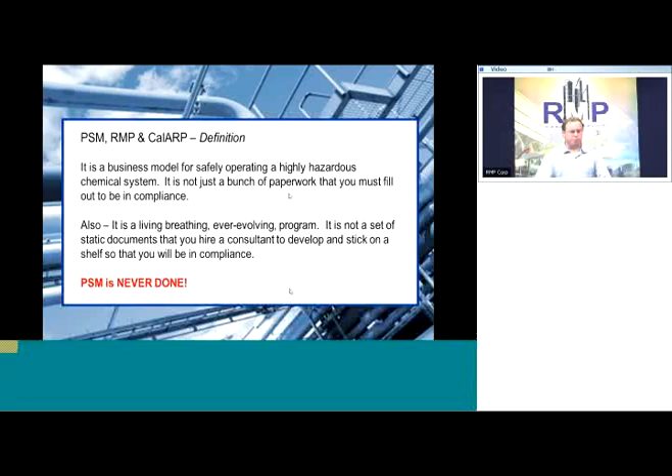So it's something we have to convince the people we report to - that I'm never going to be done, next year I've got to do mechanical integrity inspections again. Today's focus is going to be on the IIAR Bulletin 109 forms for conducting mechanical integrity inspections.

I'm not going to really focus on what the form says, that could be pretty boring. We are going to look at the forms a couple of times to highlight a few things on them, but I want to talk about the background stuff - the things you need to be looking for to fill out the forms correctly.

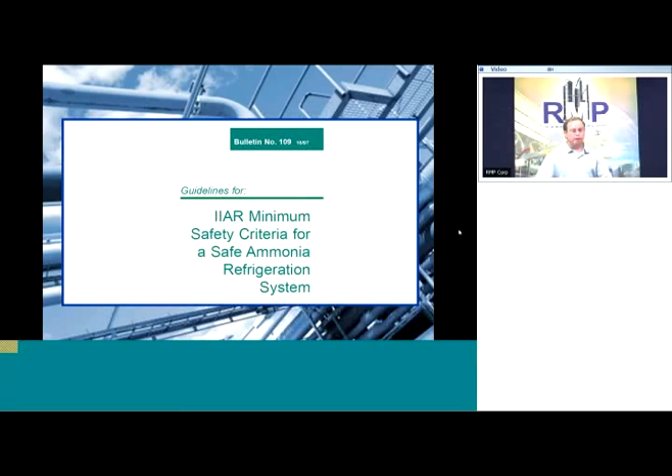First thing is we need to talk about the regulation. The reason we're doing these inspections is because this business model, called 29 CFR 1910.119, says we need to do these inspections. It says that inspections shall be performed on process equipment.

And in the food business, there's confusion here over the word 'process.' We think of process as in I process strawberries, or I process chickens, or I process something. Well, that's not what it means when it comes to PSM, RMP, CalARP. From a regulatory standpoint, we are not a food processor, we are a chemical company. Our process is our refrigeration system. That is our process. So when it says perform inspections on our process equipment, that means our refrigeration equipment.

That's our process. Inspections and testing procedures shall be performed using - and to me I don't like this term, but everybody in the industry is throwing out this RAGAGEP thing - generally accepted and good engineering practices.

The RAGAGEP acronym I'm not real thrilled with, it's kind of a clumsy thing to say, but that's a critical part of everything PSM - it follows good engineering practices. So Bulletin 109 is a guide to following good engineering practices when conducting our annual visual inspections.

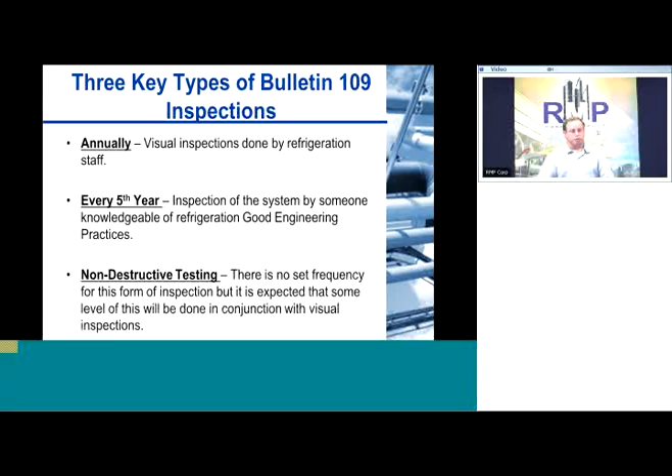Annual visual inspections - make a plan, get it done. This isn't something you want to remember in December, like 'oh yeah, I forgot, I got to do that again this year.' This is something you need to plan for, have a plan, and enact the plan. Smaller facilities, you could pick a week - the 3rd week of April is when we do all of our annual visual inspections - or you pick a time to do it because you only have so much equipment.

But large facilities, places with lots and lots of equipment, it should be part of your PM program. It should be a PM in whatever software you use - I know a lot of large companies are using SAP these days to manage their PM programs. It should come out as a PM that says inspect this piece of equipment. However it is done, whenever it is done, just make sure you get all the equipment done and tested and inspected, and that these are separate from our regular PMs, and that we document that we've inspected every piece of equipment every year.

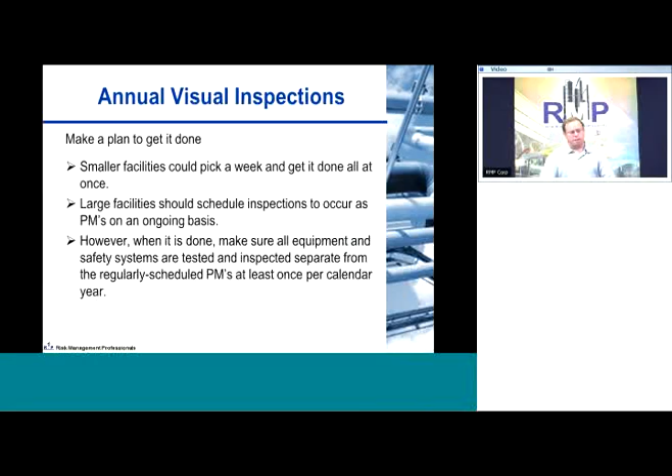5th year inspections - this is a tricky thing to implement, because there's no consistency in the industry. You're going to hire who you're going to hire - a consulting engineering firm or a refrigeration contractor - and they all have different skill sets, different levels of knowledge, different ways of conducting these. In my experience as an in-house corporate PSM guy, I would hire firm A for one facility and firm B for another, and in my mind, visiting these facilities, they were in about the same condition, about the same size.

At one facility, the contractor I hired gave me 5 recommendations for the whole facility - and 5, I mean, he missed a lot of things. Then at another facility that was very similar, a different contractor was hired, and he gave us 850 recommendations. I don't know how you guys manage your recommendations and how often you review them, but can you imagine having to go through 850 recommendations and reviewing them monthly and driving them forward? That's a huge task, so there's got to be ways of grouping those or something. You have to carefully pick who you're going to use, because you don't want anything missed, but you also want it manageable.

This is not a free ticket. Every 5th year I have an outside person come in, but I would still make it part of your task to assign somebody each shift, however you do it, so that one of your operators is working with the inspector. Your operators know better what the deficiencies are than someone walking into the facility for the first time, so keep them together so they can help guide the inspector through the facility and show them the deficiencies.

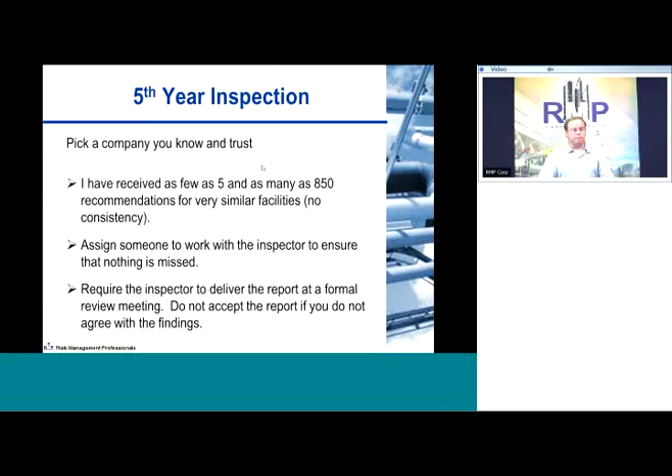Non-destructive testing, in my opinion, should typically be done as a follow-up to visual inspection concerns. I don't think you should just hire a non-destructive testing company to do ultrasonic thickness testing of your piping just because you felt you should. There's not a lot of value in it, and the snapshots of random places they choose to inspect don't give you much information. So don't just do it to say you did it.

Avoid inspection types like ultrasonic thickness testing where they drill a hole in your insulation, insert a probe, then fill the hole, which creates a mechanical integrity issue right there. Try to avoid companies that use that methodology. There are companies that use X-ray and other technologies that give you more sample points without penetrating your insulation.

Also, regulators want to know you're doing non-destructive testing, and it falls into lots of categories, not just pipe thickness testing. If you have a vibration analysis program, an oil analysis program, or an ammonia quality testing program, count those as part of your non-destructive testing so you can show a regulator you have an ongoing non-destructive testing program.

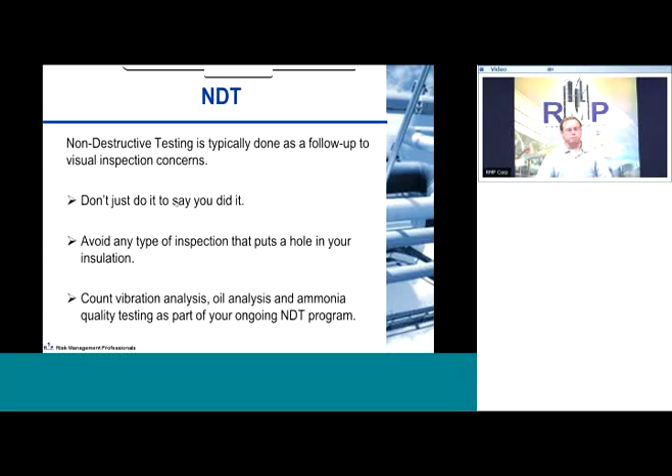Inspections are not PMs, I want to make this perfectly clear. You need a PM program that follows what the manufacturer says you should do, but that doesn't fulfill the requirement to do the inspection. The inspection is a separate activity, a separate exercise from all the PMs you've done in the year. It's supposed to be totally separate because when you're working on or fixing equipment, your focus is the task at hand.

The annual visual inspection is a separate time to go look at the equipment and assess how it looks, sounds, runs, and operates, then document anything your PMs might have missed. There are lots of things that don't come up as PMs, like a piece of equipment needing paint, or a wiring junction box missing its cover. You'll see these things when you step back and look, and you may fix them as you go, but you still need a separate record, because this is the old adage of PSM: if it's not documented, it didn't happen.

So we need a separate inspection where we document either that on that day we didn't see anything wrong, or these are the things we saw wrong that we need to fix.

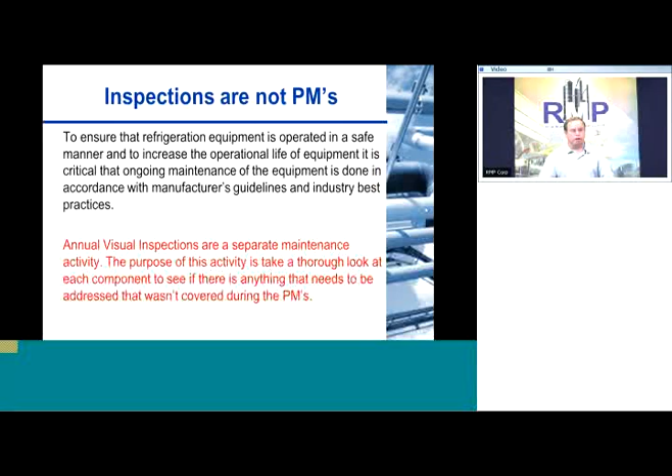Going back to the definition, we're inspecting our process equipment. Our process is our refrigeration system, so all the components of the system - there's a B109 sheet that addresses that.

Compressors, pressure vessels, heat exchangers, evaporators, condensers, pumps, piping, ventilation, relief valves, and general safety - every piece of equipment should fall into that category somewhere. As for valves, I guess there's not a sheet just for valves - I think that falls under the piping sheet, or each piece of equipment has valves associated with it, so you'd look at the valves at that time. But other than that, that's a pretty comprehensive list of generically what all the components of a refrigeration system comprise.

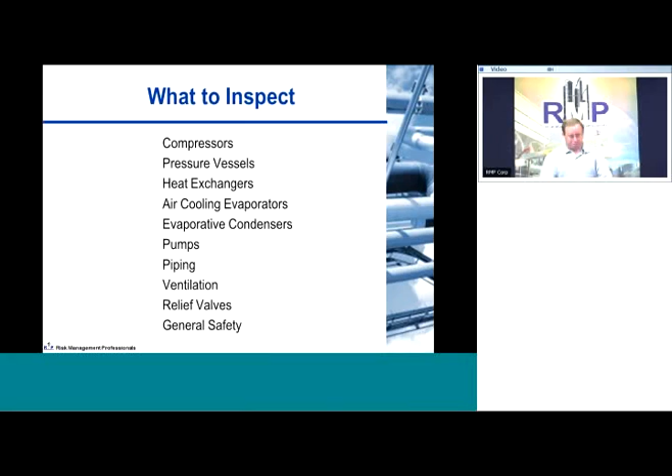Managing your time, especially with big systems, is critical, because if you have 1,000 annual visual inspections to do in a year, that's very time consuming.

So when you look at the B109 sheet, and we'll look at them in a minute, there's two sheets. There's a first sheet that gives you all the technical information about the piece of equipment - model numbers, serial numbers, operating pressures, all this stuff. And then there's a second sheet that is an inspection checklist.

It's my feeling that first sheet should be filled out either when the piece of equipment is first put in service, or if you haven't done it then, do it now. Save all those sheets in a binder associated with your process safety information. This is good information to have at any time - if you have to look up a model number on the motor for a fan or something, this is a great resource to go to.

And that information, that first sheet, should never change unless you've had an MOC process - you've done something to that piece of equipment that caused a change in it. And that could lead us into a whole other webinar of what is an MOC.

Say a compressor - if you change the motor on a compressor, the new motor is going to have a different serial number than the old motor. So this, in my mind, institutes an MOC process, because now I have a PSM document, the front page of the B109, that has to be updated with the new serial number.

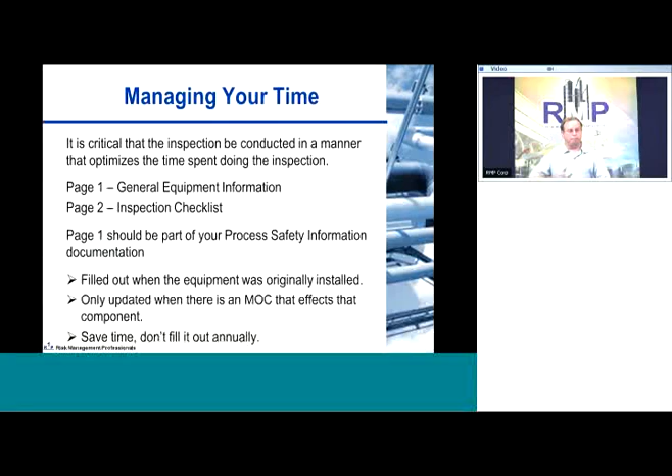First mechanical integrity point I'm going to talk about is piping. Piping is probably the hardest part of our system to conduct an inspection on, because you've got piping going everywhere.

How do you figure out how to break up the facility, and how many piping inspection sheets? You can't just use one piping inspection sheet for the whole facility. Do you have one for one header, or one for piping that's inside? You've got to come up with a plan - there's no set way I would do it. Every facility is different, so you have to come up with your own plan of how to break down the areas you're going to inspect, how to properly document the inspections, and how to document where the deficiencies were.

If you see bad insulation somewhere, you need to be able to go back and know where that place was that you found the bad insulation, whether it's tagging it with a number out in the field or associating it with a piece of equipment or a valve group. Somehow identify it so that when you're going through recommendations, trying to develop a plan to resolve them, you know where that bad area was - or if it's piping that's rusted and you want to get non-destructive testing, where was that? So that's got to be a critical part of developing this piping inspection plan - how do I remember what part of the system I was looking at when I saw that deficiency.

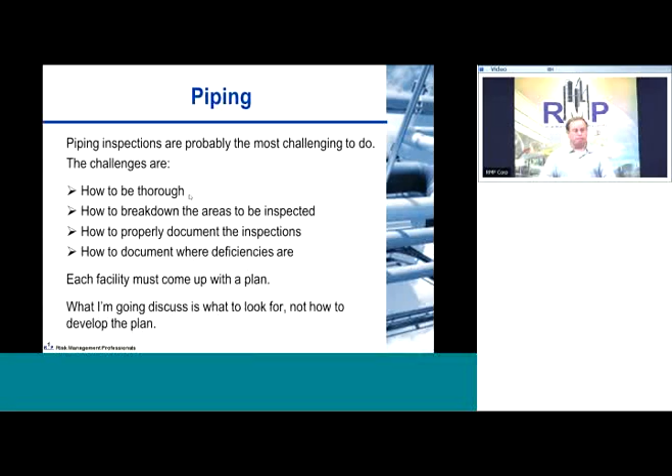As we progress, we're still talking about piping and issues with piping. I want to talk about what we're looking for, and I want you to keep in mind that ammonia is not corrosive. So you can be 90% confident that there's no corrosion going on inside your piping.

Most likely any corrosion is going to be external corrosion, and there's going to be some telltale signs I'll talk about that lead you to believe corrosion is happening. But there's a 10% chance there is some internal corrosion, and I'll talk about that too. Corrosion and wall thickness is a major concern because we want to keep the ammonia inside the system. We don't want it getting out, and if our wall thickness gets too thin, we're going to develop a hole and our ammonia is going to get out.

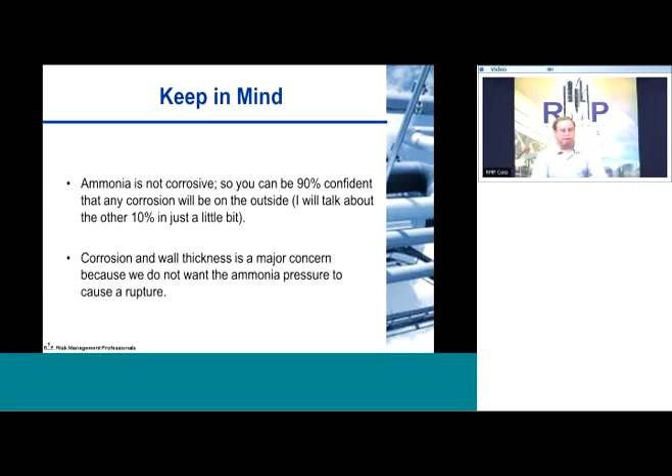The reason that's going to happen is our refrigeration system is kind of like a non-inflatable balloon. The little balloon in my picture has about 5 psi of pressure to blow it up. The high side of a typical refrigeration system runs between 130 and 180 pounds of pressure. So our carbon steel piping doesn't expand like a balloon. As we develop weak spots in piping, it's going to rupture because it can't stretch.

The critical point here is that the ammonia pressure it exerts is a pounds per square inch pressure. So the more square inches of issue we have, the greater the potential of a rupture.

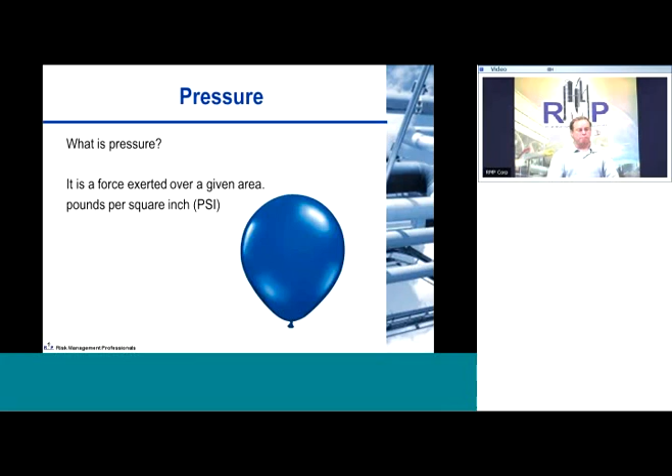Looking for corrosion: if you see corrosion during your inspection, if you see a pipe that looks like this, you've got a concern. Other areas to watch for as you're walking through and looking at piping and corrosion is if you see large amounts of ice buildup on insulated piping.

If you run your hand underneath the insulated pipe, or look underneath it, and there's some kind of growth, dirt, or mold under there, that tells you the insulation is compromised and there's moisture inside causing a condensation problem and a bacteria opportunity inside that insulation, or the insulation has holes penetrated in it, or is just bad insulation.

One of the facilities I worked with many years ago, going off subject a little bit, had the best line labeling program I'd ever seen in my life. They had line labels everywhere. And I came to find out that it was a stopgap measure more than anything.

They had PVC jacketed, insulated piping outdoors that had gotten in bad shape. So anytime they developed a hole in the PVC jacket, they put a line label on it to cover up the hole. So their pipes were really well labeled, and I guess that was a good solution.

But if you develop a hole in your protective jacket, it's going to damage your vapor barrier. And once your vapor barrier is damaged, you're going to get moisture down into the pipe. So it's critical that where we have bad protective jacketing, we address those issues.

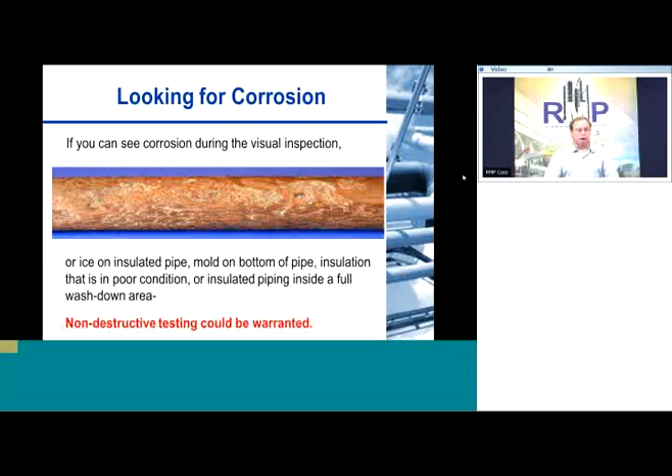Rule of thumb: I developed a rule of thumb, and if everybody looks at their thumb, if you can put your thumb over a corroded spot, and the corroded spot is as big as your thumb or bigger, then that piece of pipe is questionable. It's beyond saving. Going back to pounds per square inch as our concern.

Small pinholes that are fairly deep aren't as critical as larger crevices in our piping that have a large surface area, because we're dealing with a force. The more surface area, the less material we have to hold back the force of the ammonia, and the greater the likelihood for rupture and damage.

There's a whole set of equations, I believe from the American Petroleum Institute, that talk about wall thickness and corrosion, and you could get into a very technical analysis of your piping. But I think the rule of thumb is a good rule of thumb: if you can put your thumb over the bad spot and it's bigger than your thumb, it's a bad piece of pipe.

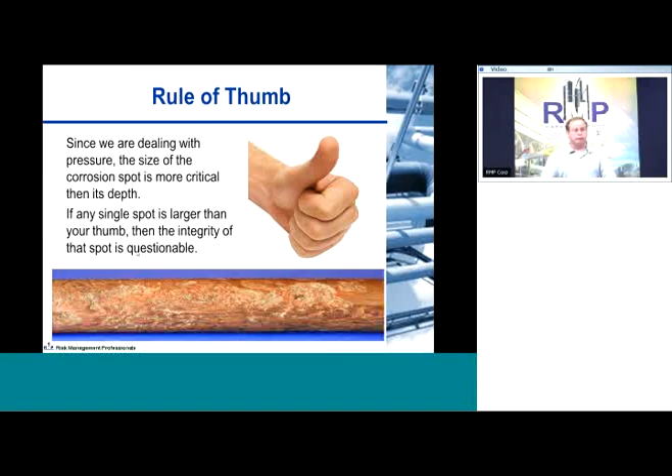The other 10%. I mentioned that 90% of all your corrosion is going to happen on the outside of your piping, but you get a 10% chance it's going to happen on the inside. So that 10% chance, if water finds its way into your system, it can wreak havoc. If water gets into your refrigeration system, it's not going to leave your refrigeration system.

When we start asking questions, if anybody wants to know, I could tell you some interesting ways water can get into your refrigeration system that you probably never thought about. But once it's in there, it's going to stay in there, and it's going to get stuck somewhere, in a recirculation loop, and it's not going to leave that loop ever.

But when we're talking about water inside a refrigeration system, we have to keep two things in mind: one, water and ammonia love each other, so they're just going to hold hands forever and never let go. And oil and ammonia don't mix, and oil and water don't mix.

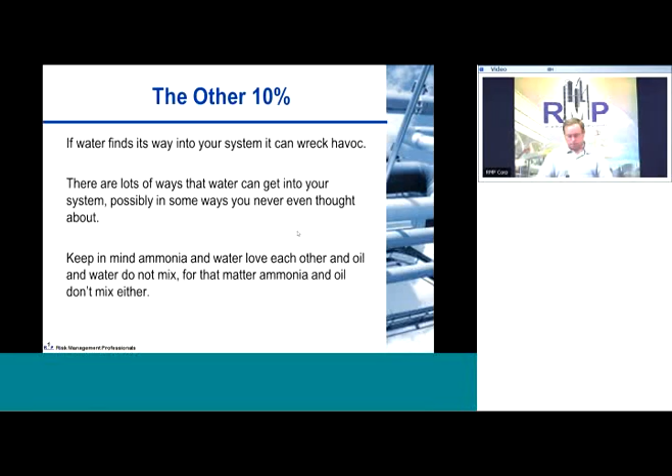So when you drain your water, people think, well, when I drain oil, I'm going to drain all my water out. That's not going to happen, because the oil and water don't mix, but the ammonia and water don't want to let go of each other. You may get some residual water out from time to time, and if you see water when you drain oil, you know you've got a lot of water in your system. There are other ways you have to get the water out of the system.

As part of your non-destructive testing program, a good PM program, I think you need to at least annually do samples and do a water quality check. When you purchase ammonia new, it's 99.95% pure, meaning it's got 0.05% water in it. A little bit of water is important to keep the ammonia a little happy, but too much water is hard on our pipes.

This is the type of measuring device used for measuring percentage of water in ammonia. Basically, if you get out of that little nipple part in the bottom more than 1.5%, you've got too much water in your system, and you're going to have to do something about that.

If you do have water in your system, it's going to get stuck in a cold place. It usually gets stuck in the coldest place, but it can get stuck, depending on where it entered the system, in any recirculation loop. It's typically in a recirculation loop that it gets stuck, and the reason it gets stuck there is...

As your ammonia is going through this process, the ammonia boils off and goes back to the compressors. But water boils at 212 degrees, so it's not going to boil. It just stays in there, and then it gets mixed with new makeup ammonia, and it just stays in this cold area.

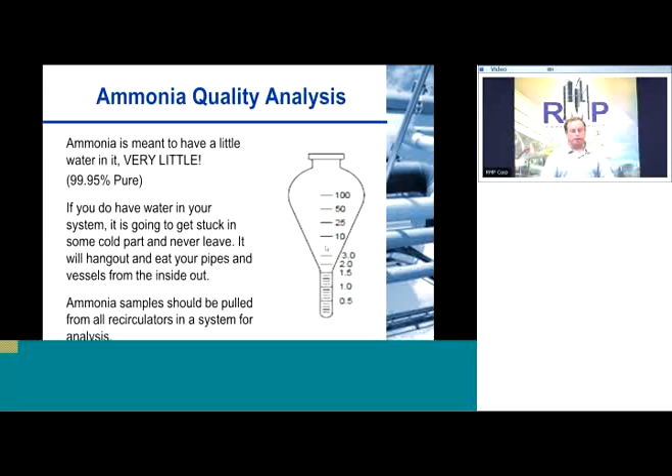Oil analysis. Do you do it? I know I've dealt with a lot of facilities that say, oh yeah, we do oil analysis, we pull samples off our compressors twice a year. I think that's great, and you're going to learn a lot about what's going on inside your compressor, but I think we're missing an opportunity when we just pull these samples off our compressors.

Oil is supposed to stay in the compressor. It's not supposed to ever leave the compressor, but from time to time, for whatever reason, bad coalescing filters or just the nature of our system, oil does get to other parts, and so that's why your operators have to drain oil at these oil pots and stuff on a regular basis.

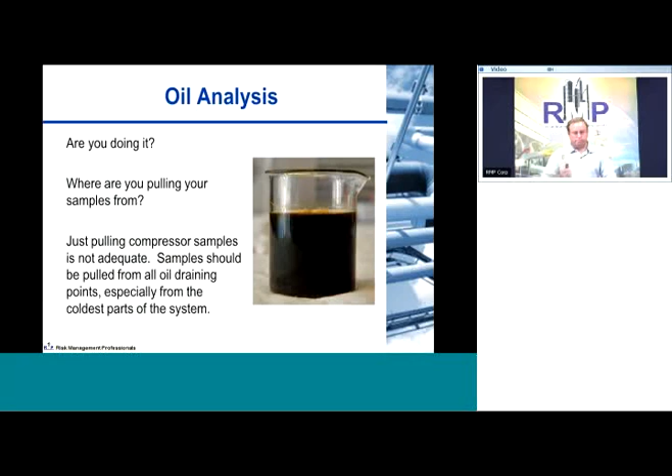So what happens is oil travels through our system. It leaves our compressors, goes through the condensers, goes to the high-pressure receiver, goes to the recirculator, goes from the recirculator to the evaporator, back to the recirculator, and then it ends up in the oil pot. So it's traveled around the system quite a bit before it makes it to the oil pot.

And in its journey, it's learned a lot about your system. For one, it's put a protective coat of oil throughout all your piping, which is a good thing. But the other thing is if I do have water somewhere and I have rust and corrosion and debris or whatever, it's going to pick up some of that stuff along the way.

And so if I pull my oil samples from my oil pots and get those analyzed, there may be some residual water that I find.

So these samples will tell us that what we're looking for is rust, residual water, and possibly metallic flakes. Metallic flakes is primarily what you're looking for when you pull your samples out of your compressors, but there could be other opportunities for them to gather up metal from your pump impellers or from different places. So it's good to pull these samples. You'll learn a lot about the inside of your system, and you'll learn if you've got any of that 10% chance of water in your system by pulling these oil samples.

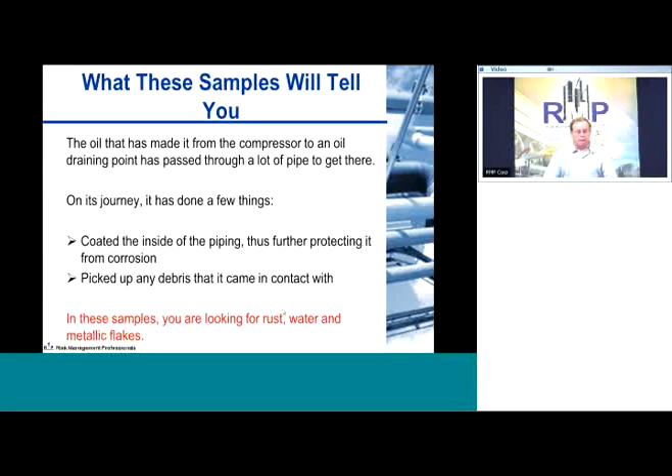As I was talking about piping, that was about pipes and vessels, because all this water issue affects pipes and vessels the same way.

But I did want to talk about vessels a little bit more. What I want to talk about in vessels is, in a minute, I have Steve switch over to the vessel B109. It asks you a lot of questions, but it doesn't ask you about corrosion concerns until question J. So halfway down the list, it doesn't even ask you about corrosion concerns, and that's really your most critical thing you're looking for here: possibilities of corrosion externally or internally. A good painting program keeps corrosion off the vessels on the outside, but these water samples and stuff are where we find these issues.

So if you'll switch over, Steve, to the B109, and scroll down just a little bit for me. Like you see at the top there, it talks about things like: do I still have a nameplate? That's what I talked about, filling out the front page and keeping it filled out and on file, not filling it out every year. But does this thing still have a nameplate on it?

That's an important thing to check every year, because for whatever reason, the painter comes along and paints over the nameplate, or the mounting bracket corroded so the nameplate fell off. You always got to make sure that annually you are looking for this, because if the nameplate falls off, we want to get that thing stuck back on as quick as we can. Don't weld it on, heaven forsake, but glue it back on or something with some kind of really tough stuff. Is it still legible? Did they paint over it?

Before we get down to J, and I'm not really going to talk about J, but I wanted to bring this one up because it's relevant to everything we do. There is a B109 about relief valves. However, each piece of equipment that has a relief valve has questions on it asking about the relief valve. So for this vessel, it's saying: do I have the proper type, correct setting, correct capacity, installed correctly? So every time I look at a piece of equipment that has potential, like a heat exchanger or a compressor or a vessel, it's going to ask me about my relief valve on that.

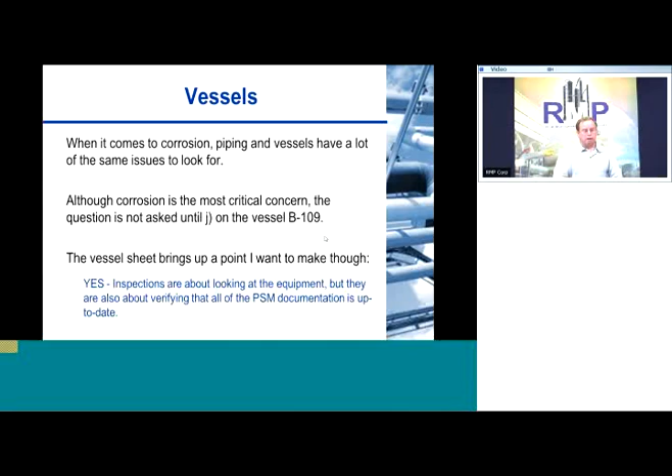Okay, let's move on. I've talked enough about pipes and vessels and corrosion. So I'm going to move on to another piece of equipment. The next piece of equipment we'll talk about is water corrosion. Maybe some people will respond, let's see if anybody responds. Anybody guess? We're going to talk about water corrosion. What piece of equipment in your refrigeration system is most likely going to need to be replaced in the next 10 years?

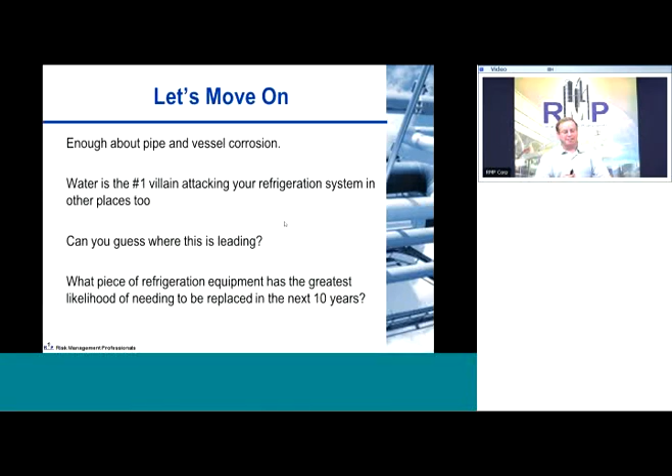Okay, I think I'll move on, nobody's going to guess, huh? It's your condensers. Condensers are the harshest environment in our refrigeration system. They just take a beating, and it's all because of the water. We're putting water into these things, and we're evaporating water. And when water evaporates, it leaves behind solids that are nasty, and we have to deal with these solids. And if we don't deal with the solids, they decide they want to clump together and eat - I mean, they'll eat galvanized steel. It's a very harsh environment.

A good water treatment program is critical, but that's not what we're here to talk about today either. We're talking about how to do our annual visual inspections on these things and what to look for.

The reason that - condensers, old condensers - sometimes I've worked with facilities and they say, well, I've got this 30-year-old condenser and it's just fine. I've got this 5-year-old one that's probably only got 2 years life left in it. And the thing is, as all things in the world, our '57 Chevy was built like a tank, and my little Toyota is built like a Toyota.

They've reduced, to save money, wall thickness on the tubes, they've changed their galvanizing techniques, they've done a lot of things to cut costs and still stay within the required parameters of the industry. These things, if we don't handle and manage our condensers correctly, are going to reduce the life, and these are the things we have to look for. There's a whole passivation program, a whole way of preparing your condenser when you put a new one in that needs to be followed, and that could be another whole discussion for another day.

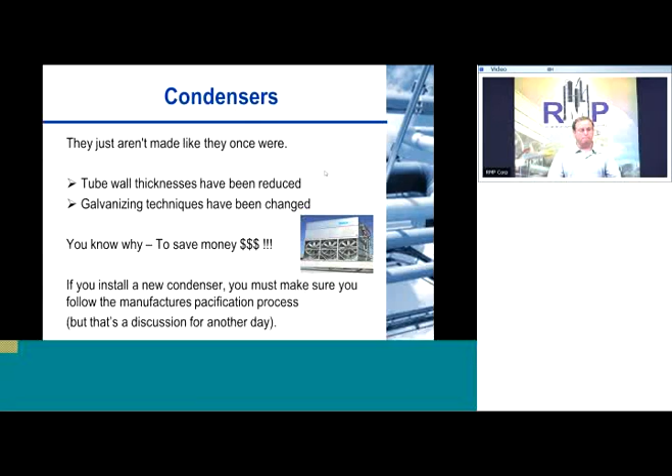I'm going to move on to evaporators. Evaporators, we still can't get away from water. Water's still an issue, but only in evaporators if you are a food processor that has a sanitation program. If you're a cold storage facility and you never wash the thing, then your chances of water corrosion are a lot less.

But sanitation workers, they tend to wash everything without regard. And spraying water, you can bend aluminum fins, you can damage coils just with the water pressure. But the chemicals we use, the chemicals that are typically used in sanitation, they'll eat aluminum, they'll eat carbon steel, they'll eat galvanized, they'll eat these things up. So we need to inspect them closely.

The drain pans, I didn't put this on here, but the drain pans are critical. Looking inside the drain pan for any kind of growth. Bacterial growth is, from a food safety standpoint, a really bad thing.

And it's not going to affect the coil, but when we're doing our PM, our annual visual inspection, in addition to - you may have a PM that says clean the drain pan three times a year, and then sanitation cleans it once a year - we should get up there and inspect the drain pan closely and make sure that there's nothing growing inside that thing that needs to be cleaned up and addressed.

There was a facility that I worked with recently that had a USDA-approved little pellet that they put inside their drain pan that killed everything. I think I have the information on that. If anybody afterwards wants to know what that was, they can email me and I'll send them the information. But I thought that was just revolutionary, that there was something I could put in there that USDA said was okay that would kill some of this bacterial growth.

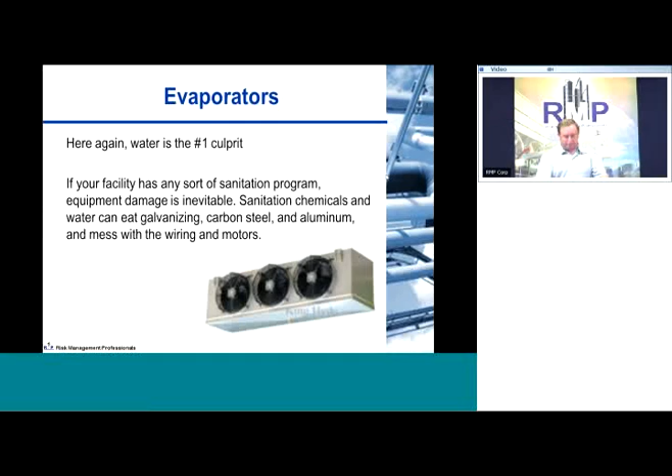Compressors. Well, finally, I think we can get away from water. When we're dealing with compressors, one of the critical things is listening to them. You walk by these compressors every day, and you get to where you know what they sound like. They sound a certain way.

And if you stand there and listen to them, and the pitch changes or something changes in the way they sound, we need to investigate that, and that needs to be part of the annual visual inspection process. Is listening: does this thing sound like it always sounds, or is it sounding a little different? Then we can start looking into why it's sounding different.

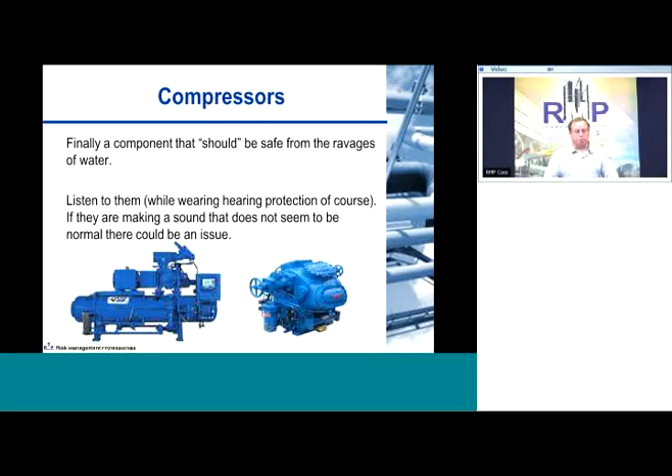What is causing these? There could be anything from liquid slugging coming back to, let's say, a bad push rod on a recip compressor, or it's out of balance, or whatever. There could be a lot of issues that listening to the equipment will bring out that looking at it won't. Because all we can see when we look at it is, is it well painted, or is all the wiring inside of the wiring tubing, things like that. So listening when it comes to compressors is a critical part of this inspection.

And another thing that compressors bring up is how many inspections.

B109 sheets exist for compressors, for vessels, for heat exchangers. But when we do a screw compressor, that compressor has all three of those components. So when we develop our PM program for doing annual visual inspections, we need to know how to group this, because it wouldn't make sense to have three PMs come out for one compressor on three different days, inspecting the compressor, then two weeks later the oil separator, then the oil cooler. We should do all three sheets at one time. Same with a flooded evaporator with a surge vessel, both inspections should happen together. Or a large facility with ten pieces of refrigeration equipment in one room, you should inspect all ten on the same day instead of going back into that room ten times.

So when developing your PM program, your inspection program, you need to group the inspections in a logical manner. Going back to the saving time idea, filling out the front sheets and managing them with the MOC process saves you time. If you group all of your inspections properly, it's going to save you time. That's important, and compressors brought that up, which is why I put it in here.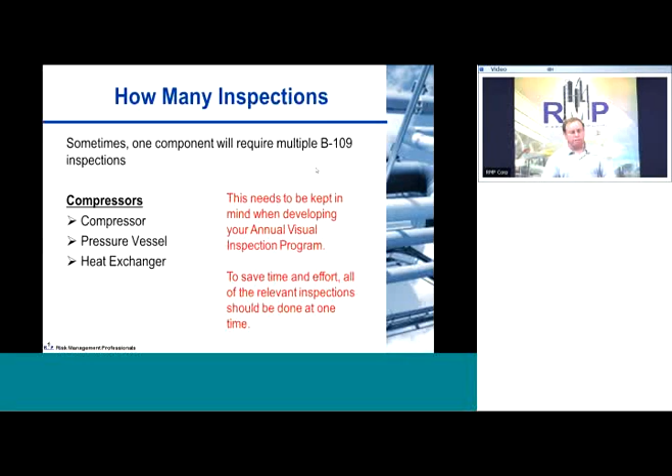Heat exchangers. Now we're back to this pesky water issue again. Water is just never going to go away for us in refrigeration. This time we're looking for more than just corrosion, we have the possibility of ice damage. I put in three pictures of three different types of heat exchangers. I didn't know that one on the right did all the things it does until just now, but that's kind of cool.

The far left one is usually used in the milk industry, orange juice - it's a Fildemeyer tube-and-tube heat exchanger. The middle one is a plate and frame, usually used in the beer industry, for things where we do not freeze our product. The last one, shell and tube heat exchangers, is usually for really low temperature applications, also for thermosiphon oil coolers on compressors.

Interesting thing about ice: if you trap ice between two places and it has nowhere to go but wants to continue growing, its force can build to 115,000 pounds per square inch. That's more force than anything our refrigeration system can handle, and it'll quickly rupture or damage a tube, or push plates apart on a plate and frame. So we really have to look for ice on these heat exchangers in places we didn't expect it, because it'll destroy that piece of equipment. Unfortunately it tends to happen pretty quickly, before it's even time for our annual visual inspection. We've had the problem and we've had to fix it.

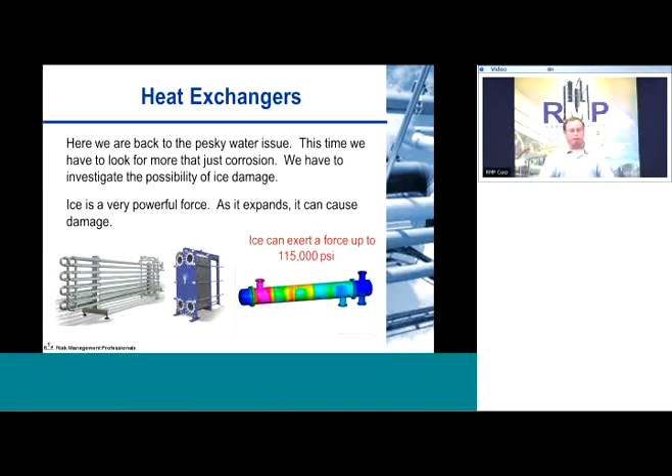Since I brought up ice, I want to talk more about it. Let's go back to piping and vessels for a second. The obvious ice issue is weight - everybody says, well, if we have ice on this suction line, is it putting too much weight on the pipe, is it going to bend it, or weigh down the roof and cause it to collapse. That's an obvious concern, but I'm not here to state the obvious. We can see that. What I want to talk about is corrosion in ice.

Ice and corrosion have a very interesting relationship. Ice is a really good insulator and a very good vapor barrier protector. If you have a piece of unpainted, uninsulated pipe that always runs at 10 degrees Fahrenheit and stays at that temperature forever, that pipe will never corrode - it's perfectly insulated, perfectly protected by that ice.

But if I have ice on a line that goes through freeze-thaw, say a suction line to evaporators that have hot gas defrost, there's some level of freeze-thaw so the surface area between the pipe and the ice can melt and refreeze. Then I have a tremendous corrosive opportunity - it'll just eat the pipe away. So ice is interesting: in one case it's the best protection, we don't want it, but it really is the best protection that pipe could have. But if there's any chance of the surface between the ice and the pipe melting and refreezing - not the outer surface of the ice, but the surface between the ice and the pipe - the corrosion opportunity is tremendous. This is why we really need to be concerned about seeing ice on pipe or vessels, because if there's any freeze-thaw opportunity at that surface, there's a tremendous opportunity for corrosion.

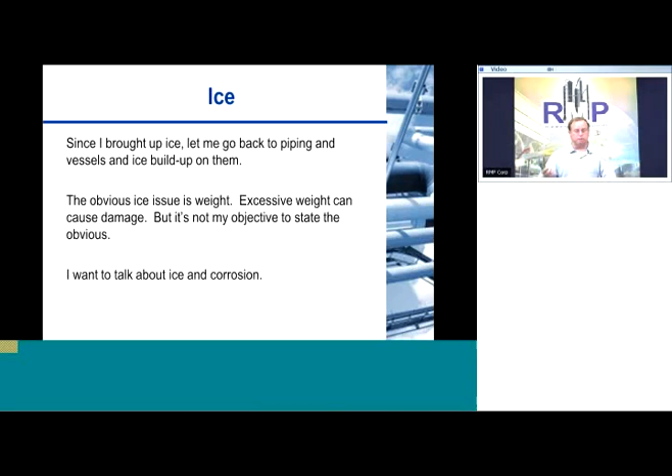Ice and corrosion - if piping goes through freeze-thaw cycles, it's likely extensive corrosion is occurring. This is a good opportunity to bring in non-destructive testing folks to see what's going on. You could also thaw out the ice and look at the pipe, but it's not always practical since we need to keep our system running.

So you bring in people that do non-destructive testing using X-ray technology. They have a tool, like a wand, that can run over your pipe and adjust for the density of ice to give you the thickness of your piping even without thawing it out.

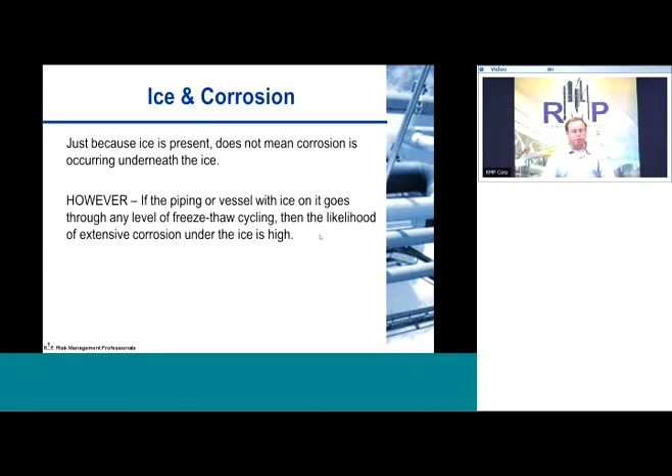I want to talk some more about ice and priorities. When I finish this presentation, I'll talk about managing your recommendations and how to develop a plan to resolve them. But right now, I want to talk about ice and priorities.

All ice where it's not expected is bad. There are places where we see ice all the time, on certain valve groups, on the suction valve to our compressor, on valve groups where insulation is on both sides but the valve group itself is uninsulated. We expect it on our oil pot, places like that. The places where we don't expect to see ice - if we see ice there, that's bad.

So when we prioritize which bad ice locations to resolve first, the places that stay frozen all the time can wait for a later day. But the places that go through a freeze-thaw cycle - those are the areas you need to address first. Those would probably be your highest priority recommendations of all, not just on piping, to resolve.

Ventilation - there's a ventilation annual visual inspection sheet, B109, that asks a lot of questions about whether you have enough ventilation. One thing about ventilation: never take the manufacturer's cut sheet on the fan as the gospel when it comes to the amount of air that fan is moving.

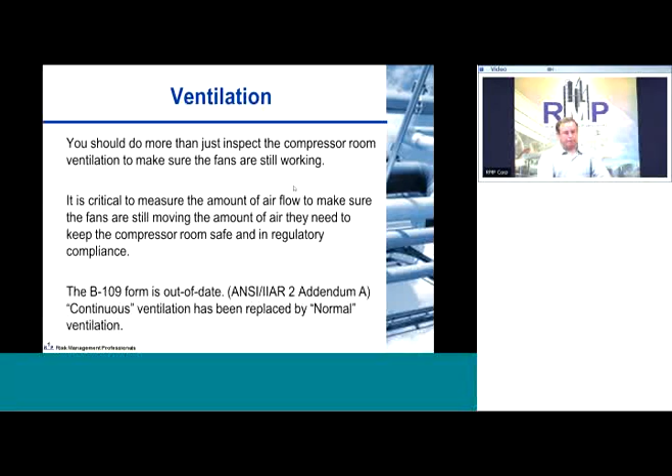Now back to relief valves. Like I said, each sheet, like we looked at the vessel sheet, asks you some basic questions about the relief valves. But then there is one sheet that asks you specific questions about relief valves as a whole.

And this is where your refrigeration guy not only looks at every relief valve in the system, but now we've got to sit down, and maybe this isn't a task for the refrigeration hourly operator, but maybe it's the sheet that the refrigeration supervisor or plant engineer fills out, because now we need to make sure that all the valves we have in the system are the right valves.

That they comply. Everybody knows that every 5 years we've got to change our relief valves. I don't think it's unheard of that somebody accidentally changes a relief valve and puts the wrong one back in place. That's part of what we're looking for when we do this exercise.

And this is a roll-up, a summary of all of the inspections, making sure we have the right relief valves where we need to have them. Is the right valve on the component? Is its operating pressure lower than the maximum allowable working pressure of the vessel?

Is its discharge rate correct? Well, I've got to look at the calculations to know what the discharge rate is. Is the manufacturer's seal still in place?

Especially if you have relief valves on condensers, or in a sanitation washdown area, the cable that holds the lead seal is a galvanized, carbon steel braided cable, and it doesn't hold up very well to washdowns or humidity, so they can break. If that seal is broken, in a regulator's eyes, that valve is no longer good, so it won't live for 5 years by regulation.

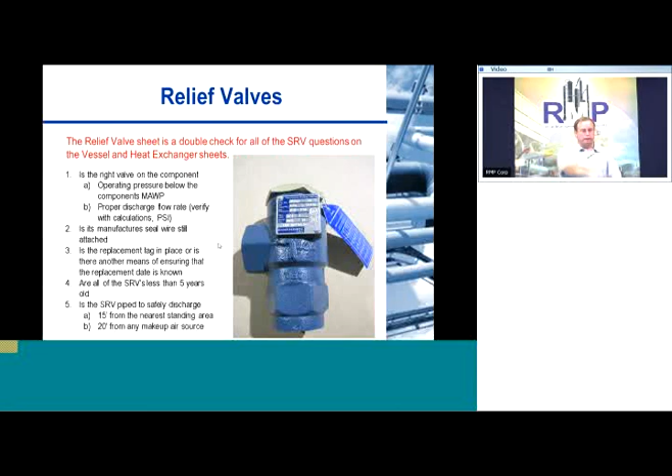We also need to know where our main hot gas valve is. It doesn't have to be labeled anything special — maybe main hot gas valve, but I've seen it labeled as queen valve or prince valve, or I don't know how you come up with those. But we need to know where our main feed sources are.

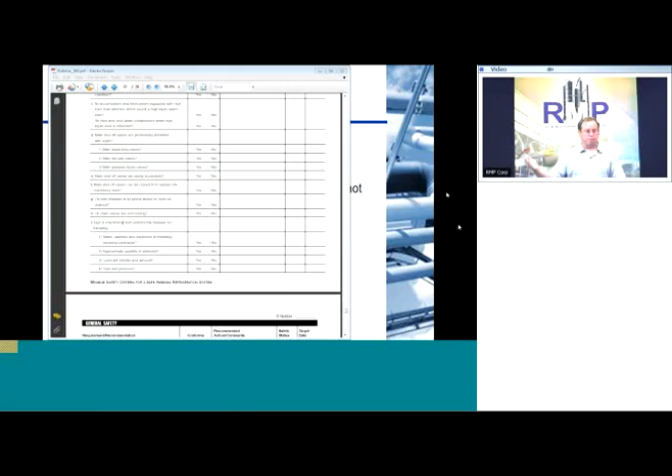And your field test pressure—really, I don't know if they always do that when they build a new system, and if you're inheriting an old system, you're not going to know what pressure they tested it to. But whatever your highest maximum allowable working pressure is—if one of your vessels is a 300-pound relief valve maximum allowable working pressure, that would be the highest test pressure. But I don't think you want to use that one, because if you have some 150s, you've got to decide: am I going to use the lowest or the highest? But have a reason you chose that. I think I would go with the lowest. If you had a 150-pound vessel, you really don't want anything in any part of the system charging up over 150 pounds.

Written evacuation plan—you need to have one, even though there may be only one or two doors in and out of your engine room. You still need something on the wall that says this is where you are and this is how you get out of here.

Housekeeping is important. System free of abnormal ice formation—that's another roll-up question, because we'll have talked about that in our piping stuff.

Eye wash and shower—this is really important. Your eye wash and shower needs to be located within 15 feet of the door that exits your engine room. You can also have them inside your engine room, but you can't have them inside instead of outside. So you need at least one within 15 feet of the door that leaves your engine room, and you need to test to make sure it works.

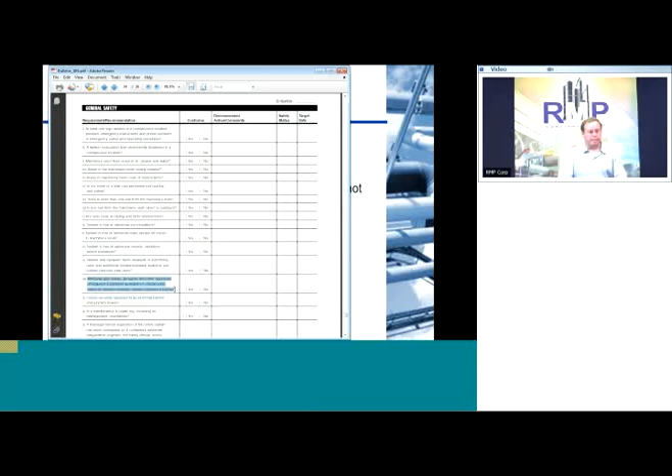I think I've covered this good enough. If we can go back to the PowerPoint.

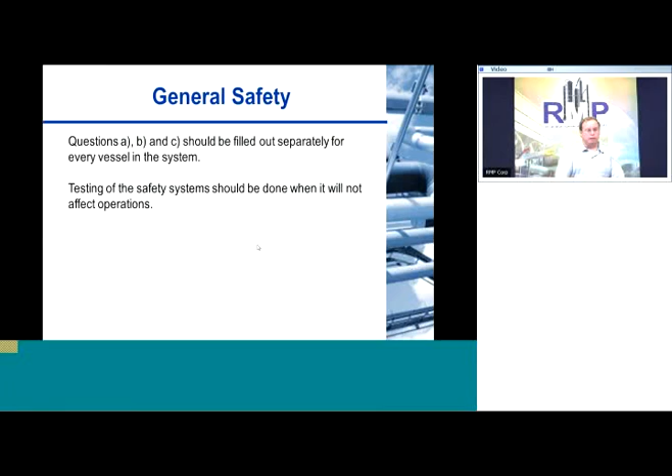Okay, then pumps—I apologize, I'm going to send Steve back over. Pumps are pretty straightforward. There's not much to talk about with pumps, but we'll just look at the sheet real quick on the pumps.

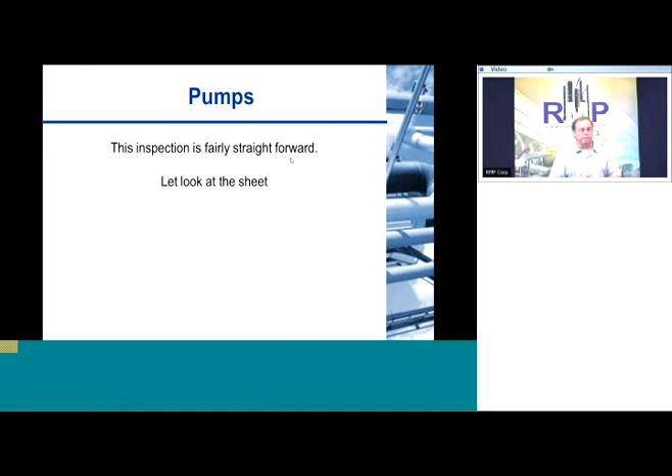We're looking there again for the label on it. I want to say something about labels, because everyone is going to ask if the label is on it. There's only certain things that have to have nameplates by regulation—heat exchangers and pressure vessels have to have a nameplate. If your evaporator, condenser, pump, or whatever has a nameplate that's gone and not legible anymore, but the thing works just fine, there's no regulatory requirement to replace it.

So be careful when you fill these things out. If it says no nameplate, the guy has to inspect it and say there's no nameplate on it. But we need to somehow address that as management and say no nameplate required, equipment working within accepted parameters—somehow address it so the regulator doesn't pull the sheet and say, well it says no nameplate, what do you do about it?

Operating within limits—I wish these sheets had more than yes and no. I wish there was an 'unknown,' because I don't know if the operator would ever know, and I don't know where he would find out if the pump speed is correct, if his design pressure is correct. That's kind of beyond even me as an engineer to always dig up that answer.

It's not leaking, it's pumping ammonia, and it's working. But the important thing is free of excessive vibration—is it making a sound or anything like that? So pumps are pretty straightforward, not a lot of questions, and some of them we can't even answer. If it's unknown, just instead of putting yes or no, put unknown in the comment column.

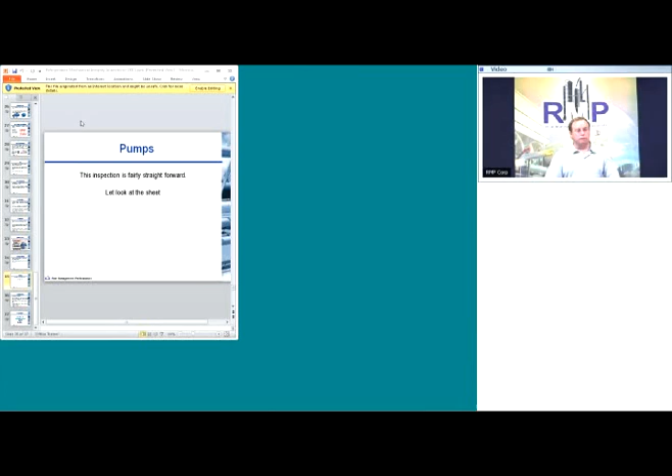If you'll jump back over to the presentation—deficiencies. We've talked about all the pieces of equipment, and a lot about water, because I think water is our number one culprit when it comes to damaging our refrigeration system. But what I want to talk about now is, as you fill out these forms, people are going to put no's, and if they put a no without writing something to do, somebody's going to have to come up with a plan, or a comment saying we don't have to resolve this because it's not required to have a nameplate or whatever.

As a corporate PSM manager for so many years, I learned a valuable lesson: my number one job, and the number one job of everybody that runs any refrigeration system, is managing our recommendations and moving those recommendations forward. We can hire consultants to come in and do PHAs and compliance audits, and they're going to make the recommendations, but we've got to figure out what to do about them, and do something about them in a timely manner, and document how we did it and what our plan is if we haven't finished it.

I think if we make an annual visual inspection recommendation, we have to prioritize them. The low priority ones, we better resolve within a year, and the highest priority much sooner.

Identified and unresolved deficiencies—if somebody says on a sheet there's a deficiency and you haven't resolved it, that's just an open door for regulatory problems. If somebody writes something on a piece of paper, it becomes discoverable, and we need to address it.